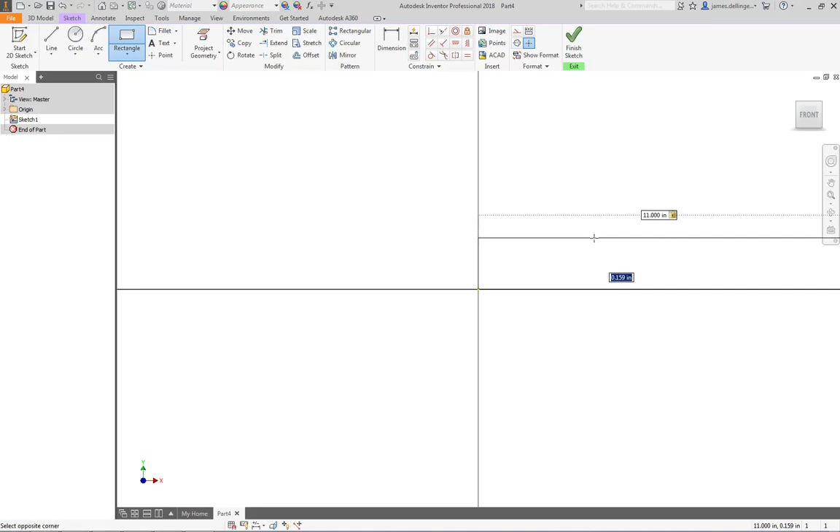So if we go over to Inventor, we'll start a new sketch. We need to make a rectangle that's 11 inches wide by 4 inches tall, and we're going to extrude that 1/2 inch, and then we'll put the radiuses in. We'll hit rectangle, we'll say 11, tab 4. That draws our rectangle, finish the sketch, extrude it, 0.5.

So we have that. We're going to go fillet, and once we put the fillet in, we want this to be 0.5. Because if we look over here, the radius, 0.5, typical. So that means all 4 of these fillets have a 1/2 inch radius.

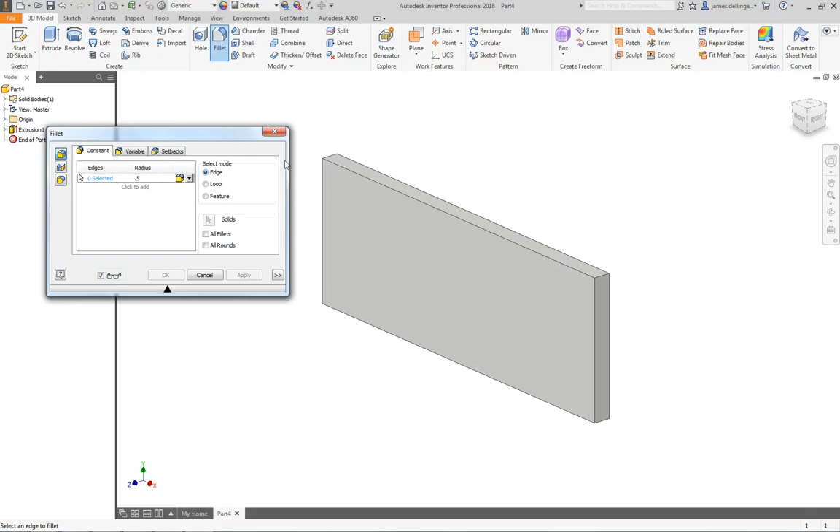So if we go back over here, we will select. If I click here, nothing happens. Just click where it says 0 selected, and then I can go and select my 4 edges. Hold down the shift key, middle mouse button. Now let me rotate around. And then I have my 4 edges.

So now I have the plate in place. Now we have to start looking at putting holes in it.

I'm going to Alt-Tab over, and let's look at our holes. The first holes that we have, and we could do this however we want. Let's go ahead and do one drawing, and it kind of typically breaks my rules. I like to do one feature for one drawing for one feature, but here, because these are all lined up on the same line, they're in the mid plane, and they come over different dimensions. You could do it either way. It doesn't matter.

Notice that there's a hole here. Let's go ahead and put these in. Let's put these 2 in, and then we'll work from there. So we need a diameter of 1/4 inch. It is countersunk, and the 1/4 inch goes all the way through. The countersunk size of the head is 1/2 inch by 82 degrees, and there are 2 of them. So we are 0.4375 over from the midline.

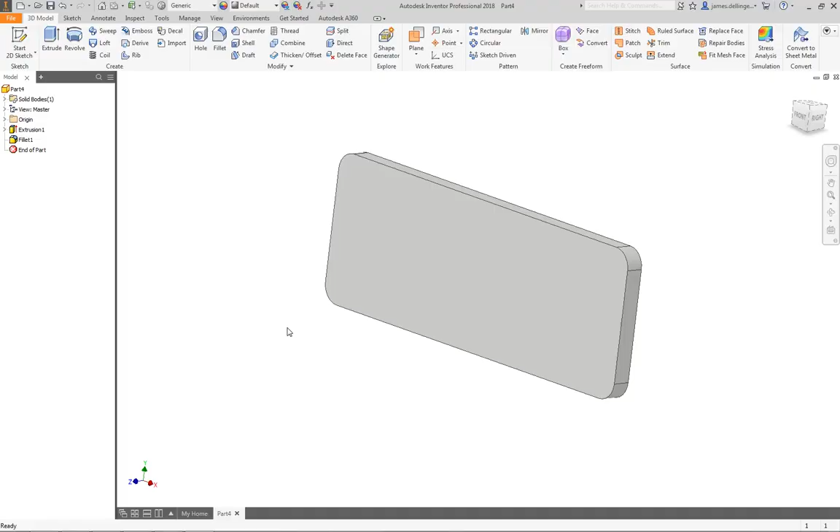So we'll go here, draw a sketch, and we'll call this the top. Once we have this in place, we can draw a line, and we wait for that to turn green. Click, go up here, wait for that to turn green. So now I have the mid plane. Click it, make it a hidden line, and then I can place my point, place my point, place my point. Dimension that from the edge to the point as 0.4375. Let's double check that that's correct.

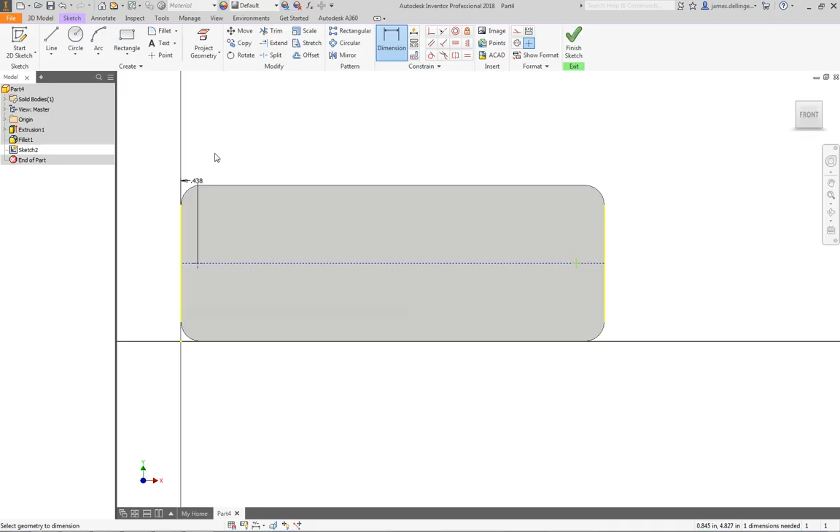Yep, and the same thing over here. Dimension this from the vertical line to the point, 0.4375. And finish the sketch. We'll just do multiple sketches. It may not be the most efficient way to do it, but it keeps everything nice and simple, and if you have to go back and change things. It's not really a big deal.

So we're going to make a hole here. It's going to automatically find those. I need a countersink. I know I need this to be 82 degrees. I need it to be 1/4 inch, and I think that needs to be 1/2 inch. So I'm going to change this to 0.5. That's the size of the countersink, so that needs to be 0.5. It's 82 degrees, and it runs all the way through, and hit OK. So now we have our countersink hole in there.

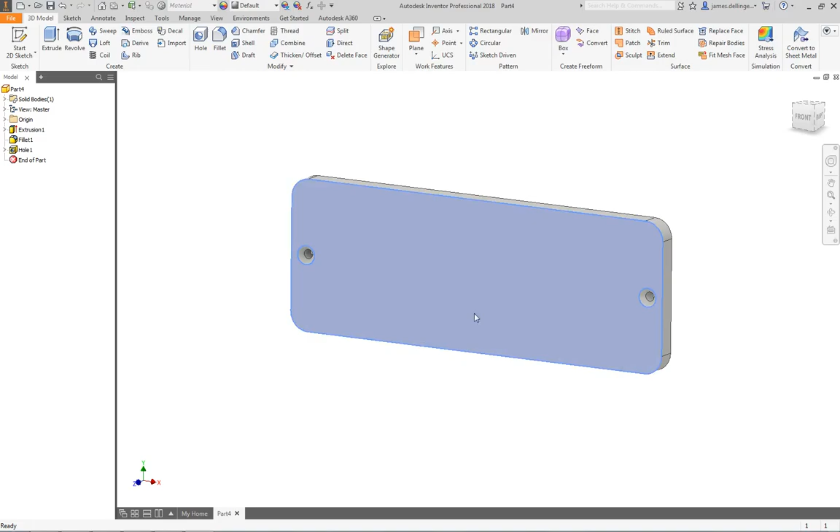So now we go do the next hole. We have a 0.3125, and there's 2 of those, 1 and 2. They go all the way through. So let's go and put that in there. It's going to be 1.5 over and 5.5 over. So we click here, draw a sketch, put my line in place.

Click it, right click, construction. And then from here, we can drop a point and drop a point. And then all we have to do is dimension it. Oops, I left the sketch, so just right click and say edit sketch. I accidentally canceled out of the sketch.

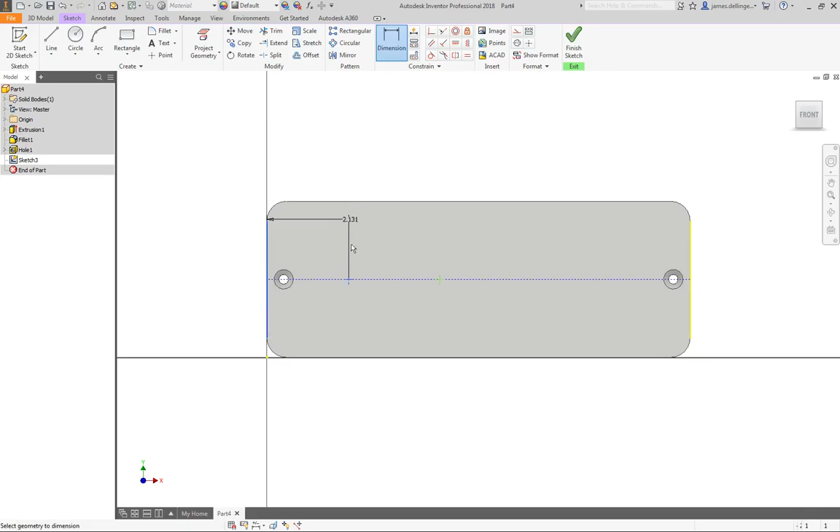And then let's put our dimensions in. Click that. Click. Drag it up. And I think that is supposed to be 1.5 and 5.5. So 1.5. Got to be in the dialog box or it doesn't work. And this is from here to here. 5.5. Finish the sketch.

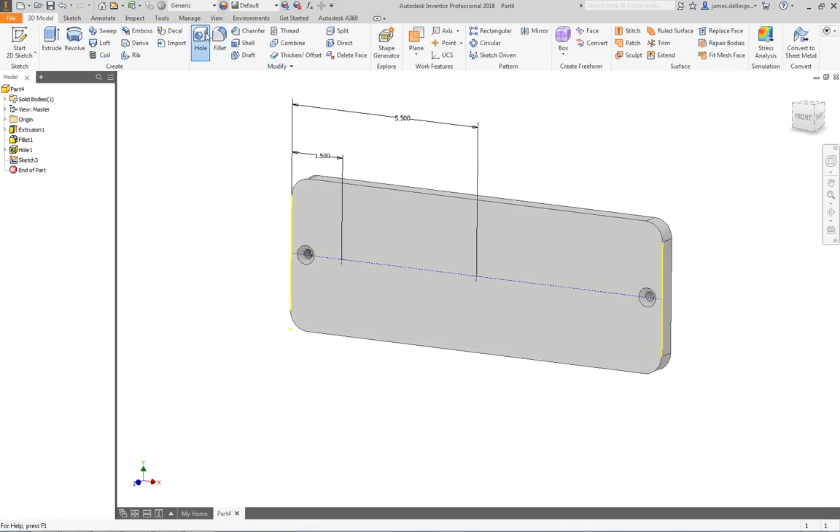Make a hole. All right, so we know this one is going to be a 0.3125 hole all the way through. There's two of them. So hole, 0.3125 all the way through, done. So now I have a hole that goes all the way through, and this plate is shaping up nicely.

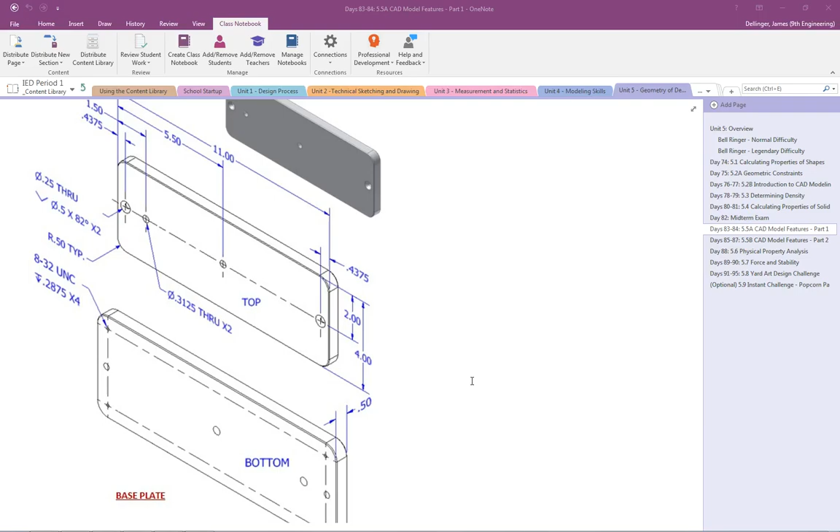So now the last thing we have to do is go to the bottom of the plate, and we're going to put in 4 tapped holes. So these are 8-32. So it's a number 8 screw that will go into it that has 32 threads per inch. UNC is the Unified National Coarse. It goes down 0.2875 in 4 places. So how deep you tap that hole is 0.2875.

All right, so if we look at this, we look at how far each of these come over. And I don't see, am I just overlooking? So it's not lined up on those holes. Oh, so this can be kind of tricky. You can see that it is in the center point of that radius. So we know that's a 1/2 inch radius.

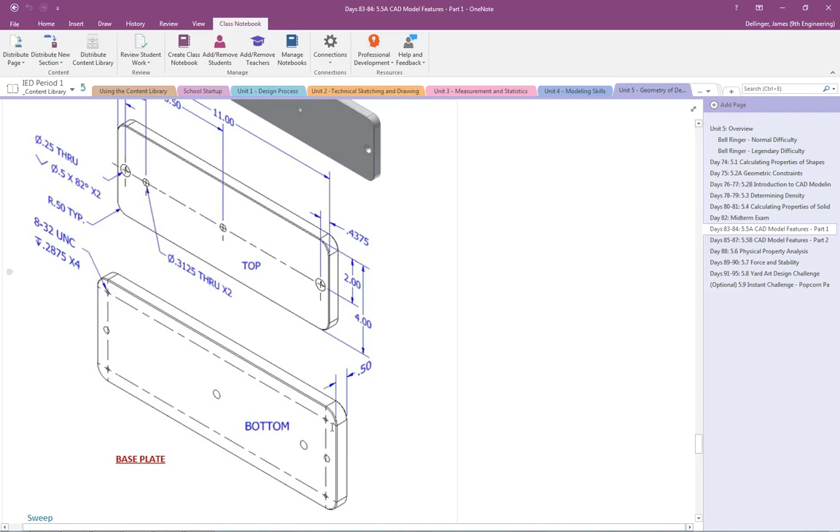All right, and this is bad dimensioning on the part of the people that put this drawing together. So we know we come over and down 1/2 inch because it is at the center point of that radius. I'm assuming that based upon this center point here, that's really kind of bad. You really should throw that dimension in there. All right, so we'll come in here. We're going to flip it around to the back. Okay, so the part that has the countersink is the top. We'll go down to the bottom.

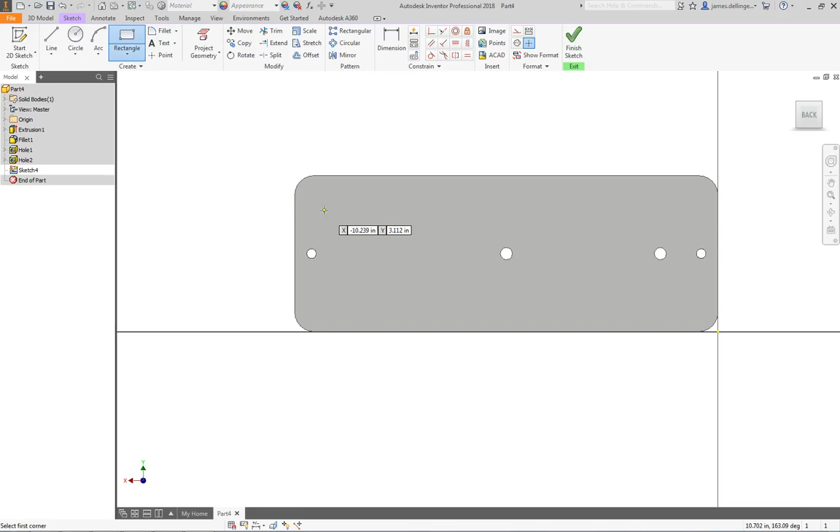All right, we're going to draw a sketch. And I'm going to start with the rectangle. Okay, I'm just going to draw the rectangle. Don't care where it is right now. I'm going to select it. I'm going to say construction. Okay, now I have my 4 points, right?

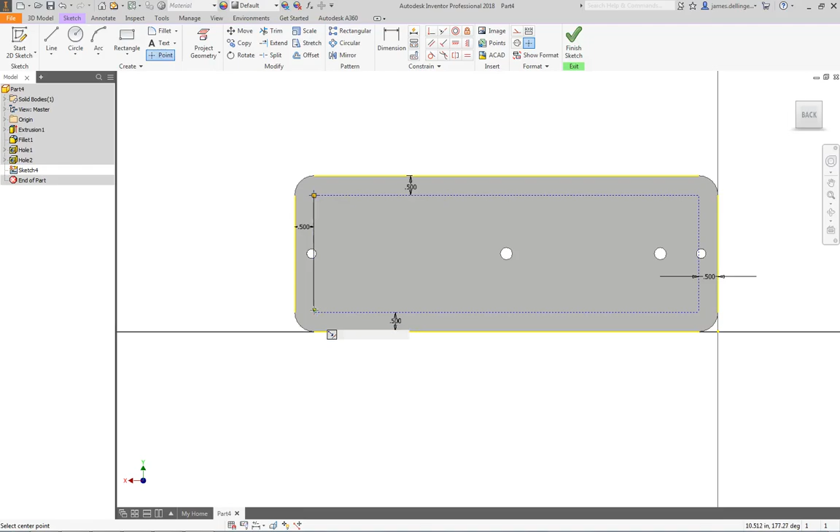So now all I have to do is say from here to here, 0.5, and go all the way around from here to here, 0.5, from here to here, 0.5, and last but not least, from there to there, 0.5, and that's defined. All I got to put in, 4 points, and then finish the sketch.

So we're going to come over here, we're going to make a hole, and we talked about before, it is a tapped hole. Okay, so it is a tapped hole, which is right here. And then unified screws, we're going to go click the size and go up here to a number 8. So 8-32 UNC, that is our designation.

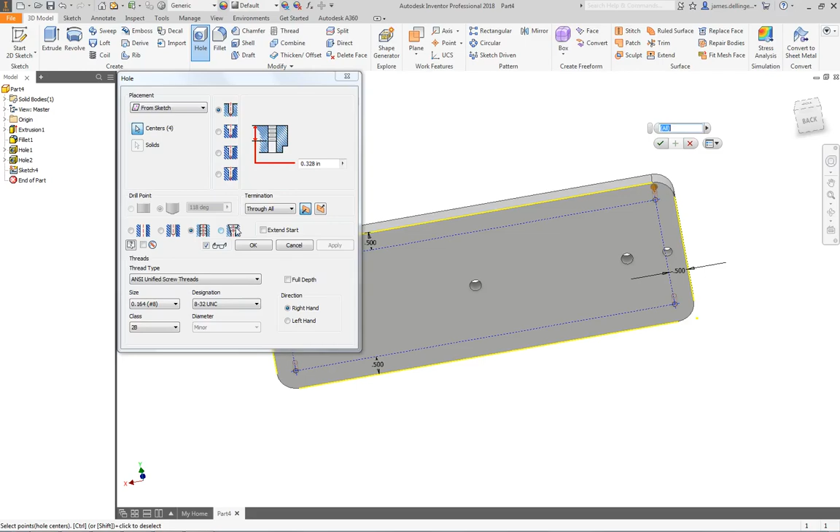And from then on, we need to go down. So we're going to go distance. All right, so how far down? So if we look at this, how far down? 0.2875. So this is down 0.2875. All right, and this is going to error out because what we thread down to is 0.2875. So just so you know the difference here, this is the depth of the hole.

So when you make tapped holes, you first drill out a hole, and then from there, you tap the hole, which is to make the threads. So what this is saying here is we're going to drill the hole to a certain depth, and then we're going to tap it to a certain depth. You don't have to tap it the entire way, but you can. So in this case, we're going to tap it and drill it to the same depth.

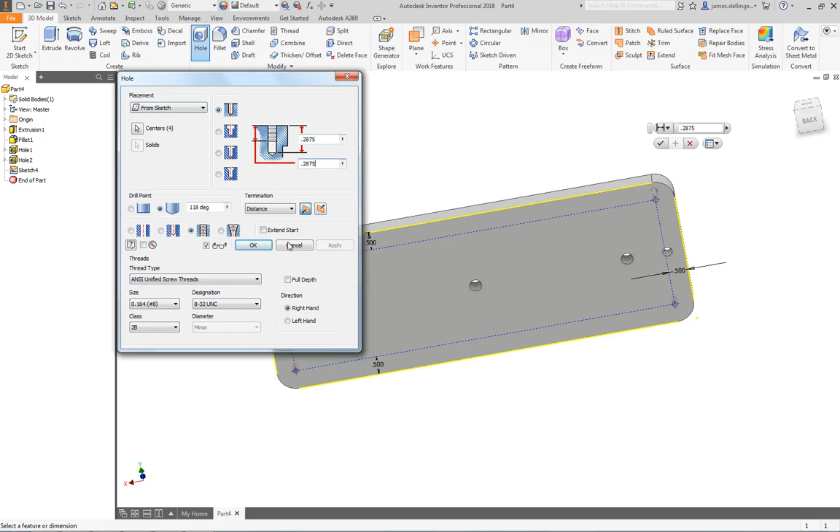All right, so hit OK, and you'll notice that our holes do not run all the way through, and if we zoom in, you can kind of see that our tapped threads, the fake threads that Inventor puts in there, run all the way down. And so that is your part.